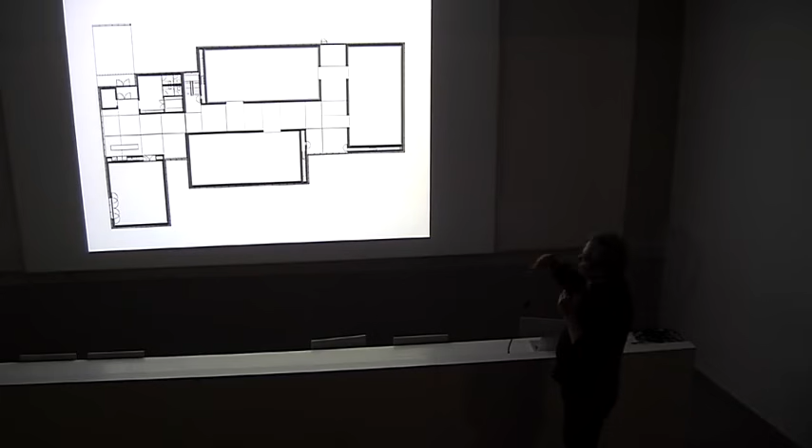He spent time there painting. So what can you do? We were quite young, not yet 30 years old. What can you do as a kind of contribution for a small museum? This was in the 90s. In the 80s there were big museums built, icons of postmodernism. There was a group of American but also Middle European artists who claimed they needed more valuable space for presenting their work, not only contemporary work but also old, traditional work. So what we did is decide to do 4 single set spaces.

In a dimension of 90 to 160 square meters. And in between there is a very distinguished, very informal space, the hallway which links these 4 spaces. You see it there in between. Sometimes it's very narrow, sometimes quite wide. It's lower, of course, than the art spaces.

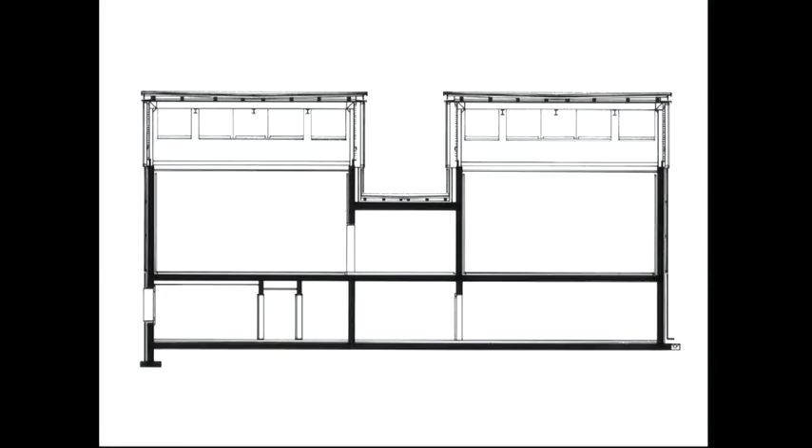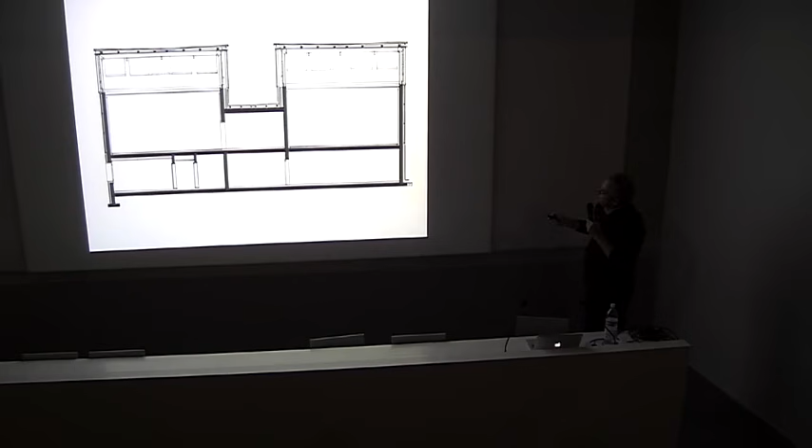The art spaces are very refined. They get light from another space, a light space from above, where light comes in from vertical windows going all along. It's about 3 meters high, with a width of about 7-8 meters. It's quite important to have this relationship of a height of 5 meters, 9 meters in width, and this kind of light space up there.

So there is already now, let's say, about 1 meter 80 centimeters of layered snow, creating these kinds of spaces. White walls, wooden floors, changing exhibitions from the collection they have of Kirchner himself, but also of colleague artists of the same time, combined with contemporary artists, and as a contrast, the space in between.

Really realized in pure concrete, three-dimensional, and lit by the doors of the exhibition spaces, but also by the windows. What is interesting is that if you change from one space to another, you always go through this kind of intermediate space, this hallway. You have this kind of zoning, foreground, middle ground, background, light spaces, darker spaces, individually enlightened spaces.

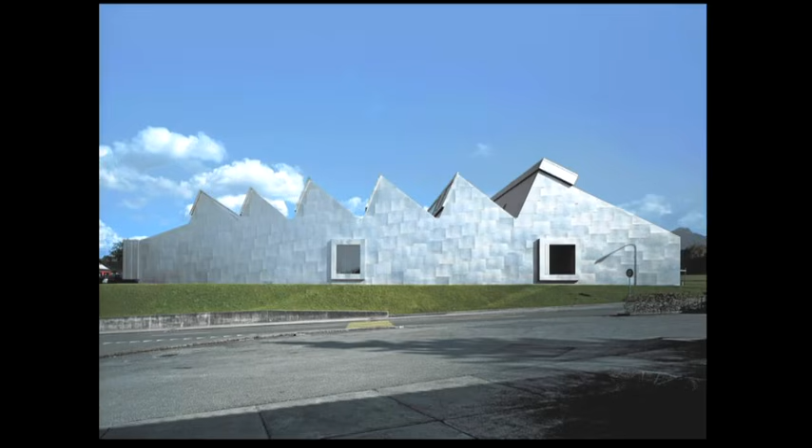It has a kind of envelope of stainless steel panels, shingles, which are in a way matte, but also quite interesting in how they take the light. And you see the differences now, which we recognize because it's also for a father and son artist duo, more local artists, with a changing exhibition program of local contemporary artists. But it was clear they couldn't have the power of what they did in sculpture, graphic, and painting works in big rooms of 150, 200 square meters, but more like cabinet-like rooms.

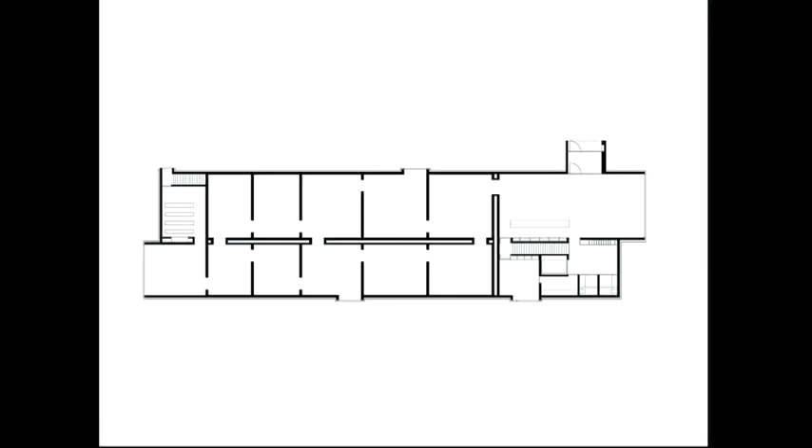So these are 30, 25 up to 55 square meter rooms in a series of 2 rows. You see it with a middle wall which is hollow to hold the technical facilities for the building, with an entry here, a huge window, a southern skylight, and all these spaces are little chapels of light.

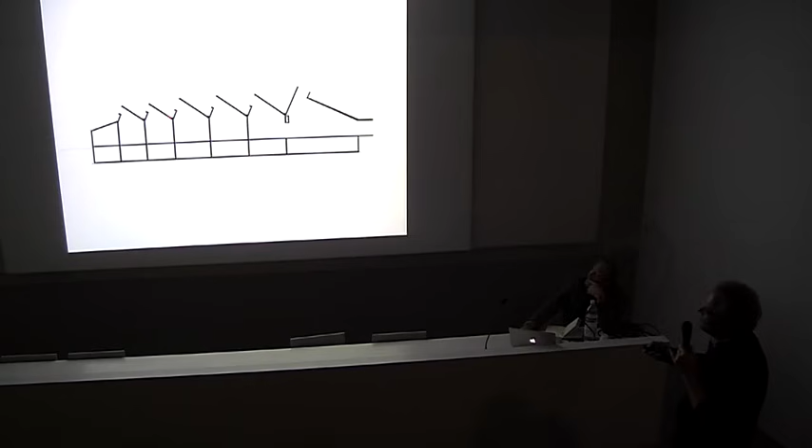You see it in the next slide with the section. So it's an addition of little light chapels, and the smaller the room is, the lower, let's say, the north-orientated shed light. This gives the silhouette you saw before.

The next one, that's the one you mentioned. Next one, Georges. That was again a step for us, because we started with this ideal spaces which became in a way more and more personal the longer we were busy with these small museums.

This is for a collection of really contemporary art, abstract art, but also art of the 60s, 70s and 80s from Middle European artists. It's the collection Albers Honegger. It was given to this place in Mouans-Sartoux in the south of France under the condition that the state France would finance a museum. And we had the opportunity, the luck also, to win this competition for this museum.

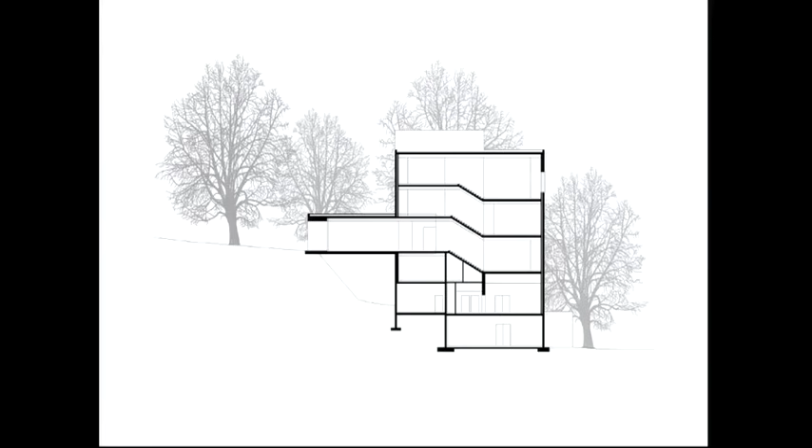It's within a wood with huge Mediterranean needle trees. It's quite dark, and it was in this small community which had a mayor who belonged to the Green Party, who was really interested in sustainability. So he was against every tree being removed. So we had to really make a kind of almost vertical, poured in-situ concrete structure.

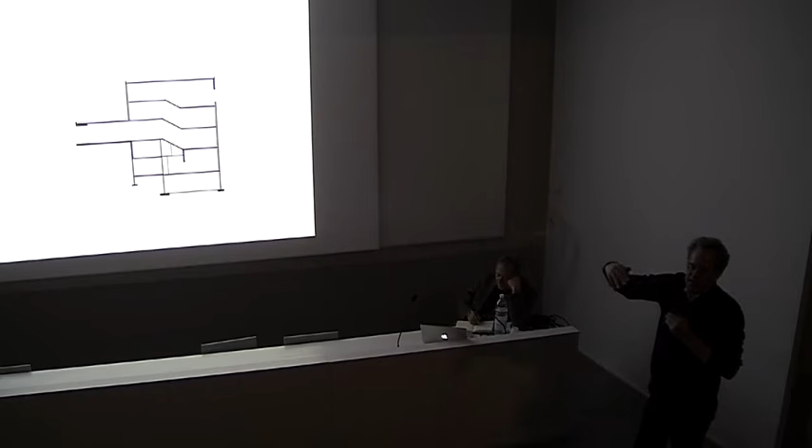A geometrized, abstract vertical object. You see, it's a split level concept. The upper three parts are the museum spaces. The part you see here is a kind of public space, then the library. And it's, maybe you go on, like a kind of spiral. It's like a huge stair, where the landings of the stairs are in different sizes, in different heights, in different widths, the exhibition spaces.

The lighting is not from above, it's from the side. So you turn, you can go on maybe, so you see the ground floor. You turn around a kind of central nucleus with the elevator in the middle, with two doors giving access to the different levels, which changes from floor to floor, with open staircases going around. And here is the entrance.

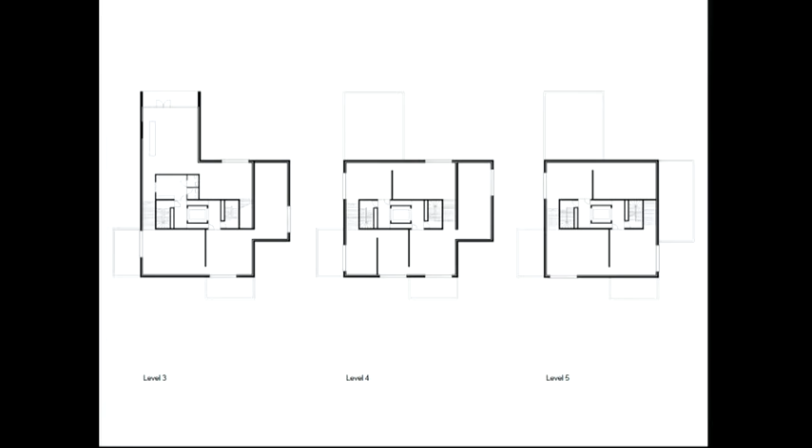It's a kind of bridge-like space, and then you go up like that. You go on like this, up into this space with the height, with the most enlarged height. And sometimes it has an enlargement like here, and on the lower part there, and even another one there, and delivery on the really first floor for the delivery of the art transportations.

So it's not anymore this kind of museum which is monumental, which is not much accepted by common people. It was also the wish of Gottfried Honegger, this quite famous, well-known Swiss artist, that this museum should become more acceptable through its atmosphere of atelier spaces.

So when you get in, or when you get into this bridge space, and then go up, you will have exhibition spaces in different tonality of light. You have the warm southern light, the light from the west part, from the cold, blue-like north light. So I think this is the enrichment of this museum.

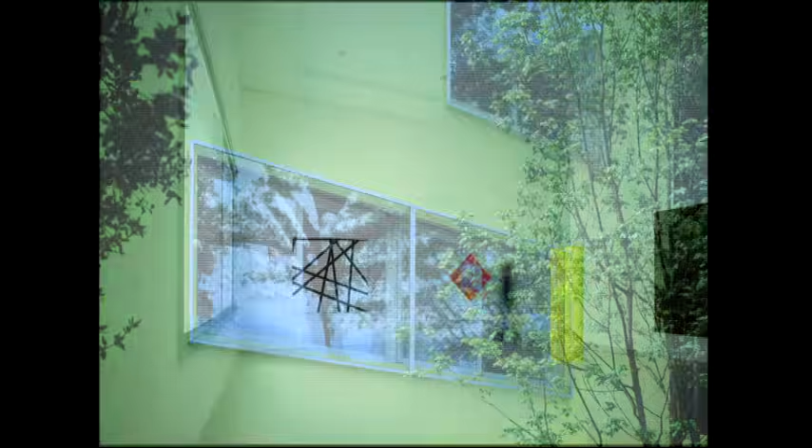It has this strong color outside. It's a visible concrete structure. It's like a light within this dark Mediterranean wood, and it has these large plates of glass in double-pane windows, which reflect the vegetation and give this kind of movement with the shadowing, again with the turning of the sun during the day.

The next one, and then we had the opportunity to go on. That's now a bad, not very visible image, but to work on a museum which is not for art, but for a given theme, like this one, which is a big area of archaeological field.

An archaeological field which signifies an ancient battle where, for the first time, the German tribes were winning over the Romans, the Roman legionnaires under the chief Varus. It's the famous Varus battle, and it's in fact, let's say, the beginning of the German national consciousness of the population.

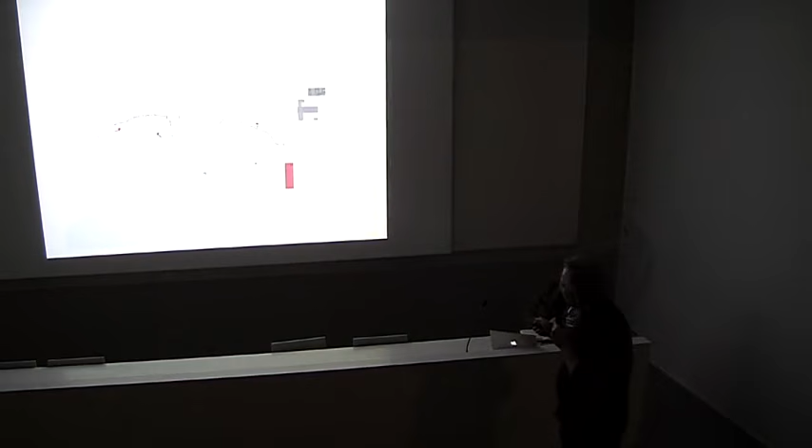The red spot you see here is the museum. You enter there, and half of the task was to remodel the woods, to make openings, to reforest, widen some parts of the woods, so you can see that the German tribes hiding here were really fighting along the whole length of this part, which might even go 10 times longer than this area here, where the first findings were found, the Roman columns coming along here.

It was very rainy, very difficult conditions in the terrain, and in fact the topography goes up like this, so it's a little bit hilly here. In these Roman times, this was really a kind of swampland, quite difficult land.

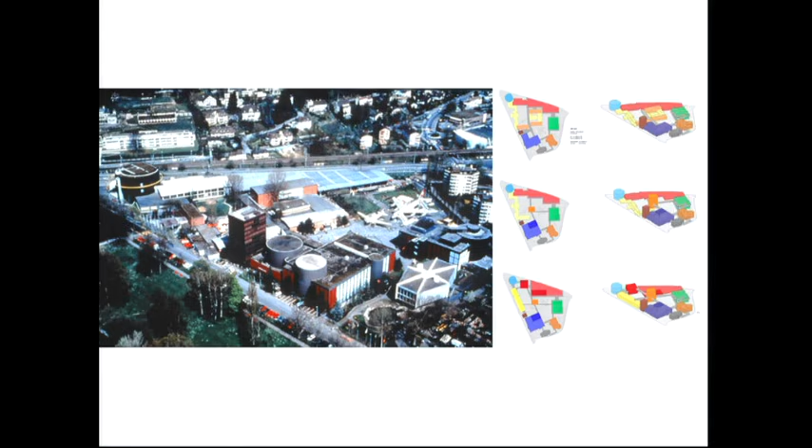It stopped then for a long while. We did some little buildings, some little interventions in the meantime, which again disappeared. There was a kind of balloon installation we did together with the Expo 2002, an installation with a tower with two horizontal arms turning around it.

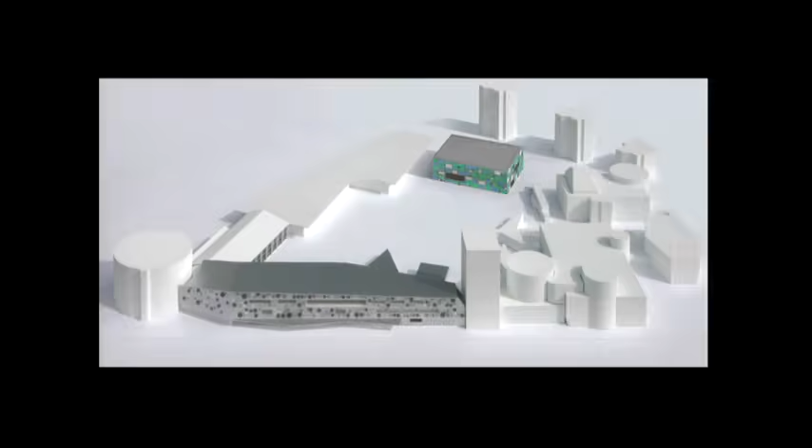But this now was the real commission, where the focus was on three points. The first one, maybe the most important one, is the empty space, the arena in the middle. And then you see this building here, the entrance building, which is a kind of hybrid of different usages, and this hall of the car in the background.

We were looking for, let's say, this is the entrance building. You enter here, you have the restaurant part, you have the shop area. It's also a building which links parts to the left, to the right side, which links parts to the central area, but also to the buildings adjacent to the central area.

Then there is an exhibition on the first floor of digital worlds, of television, of communication systems and so on, in the Congress Center on the top.

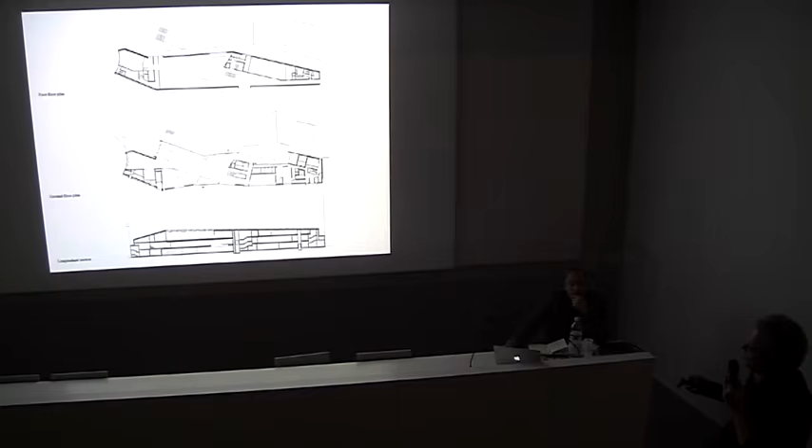We were looking for a language of how we can communicate the content of these buildings to a very large set of people, because they have more than 500,000 visitors a year. So it's the museum which has the most visitors in Switzerland.

And we invented, or we created, this kind of elevation which talks to the visitor looking at it, with all kinds of wheels. It's wheels from cars, from ships, from bicycles, whatever.

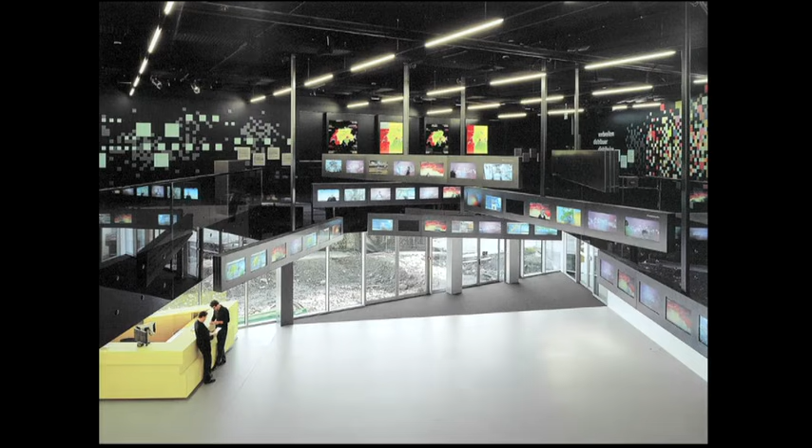And it is part of this kind of strange shape these buildings have, with large openings where you enter, large openings where you have a terrace with windows. And when you enter, you are coming into a space where the exhibition on the first floor is really present as this kind of ongoing, very visually strong presence of the digital world.

And on the other side, as an opposite, there was the question, this demand of a house for the car, for the moving vehicle.

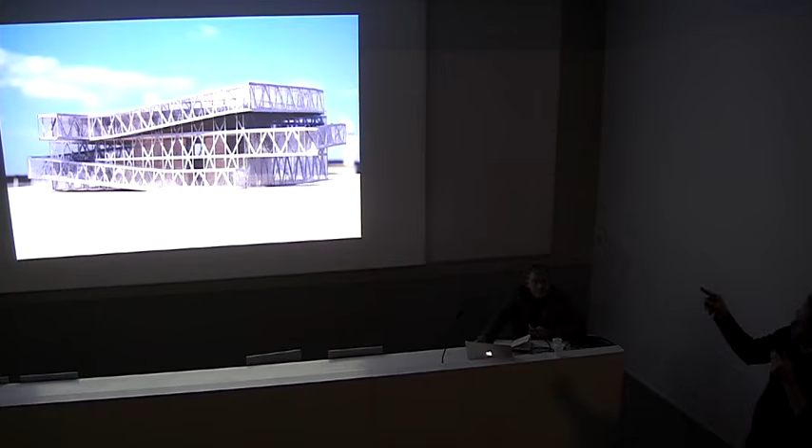The first proposal we made in the 90s, together with the first competition, was this kind of central hallway, structured, very simple structured hallway, which has these ramps encircling, and these ramps reaching the neighboring buildings on different levels, which can give a kind of moving space for people, for visitors, but also for cars, for bicycles.

And then, because the focus was more oriented to the entrance buildings, they just asked for a decorated shed for a car. So what we did, we made a simple hall. We made a kind of mechanical storage space for the cars, for the collection of cars they have, which they could, together with sponsors, have different zones with different themes.

And we tried again with elevation parlante to have an elevation of the kind of compressed cars when they did their work. You know them, this kind of huge junkyards of these stacked, pressed forms of cars. And we wanted to put them as a kind of vertical setting on the facade, as a kind of mirroring of what the beautiful arrangement of the cars in this kind of mechanical archive has in the interior.

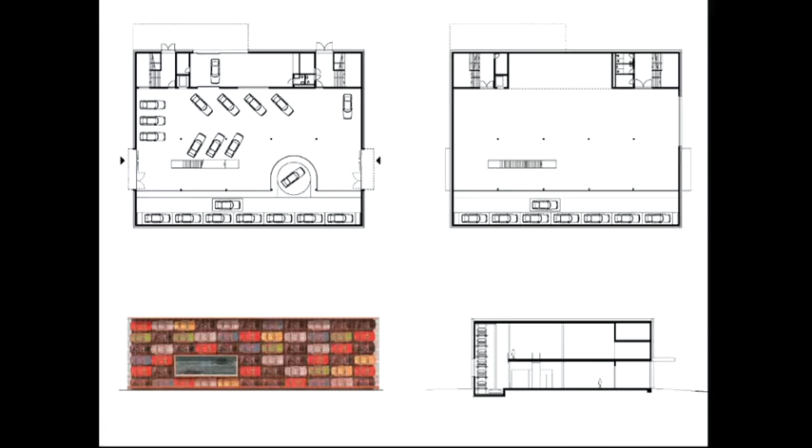But of course, because there were sponsors like Audi, Mercedes, and Renault giving money to the people, they were not willing to go with us in this direction.

So we had to find another way. We were looking for this kind of world you know also very well from the street, from the Grand Route. It gave a kind of really nice result, the children love it, a kind of decorated shed where parts sometimes try to fly away, to vanish away from the kind of a little bit dull box.

They also created a didactic program, a kind of play to find panels which might not be correct, because the reasoning written there is somehow not right. So that's how we started with art museums and ended with this theme museum. There was quite a range of different expressions in architecture during those 10 years.

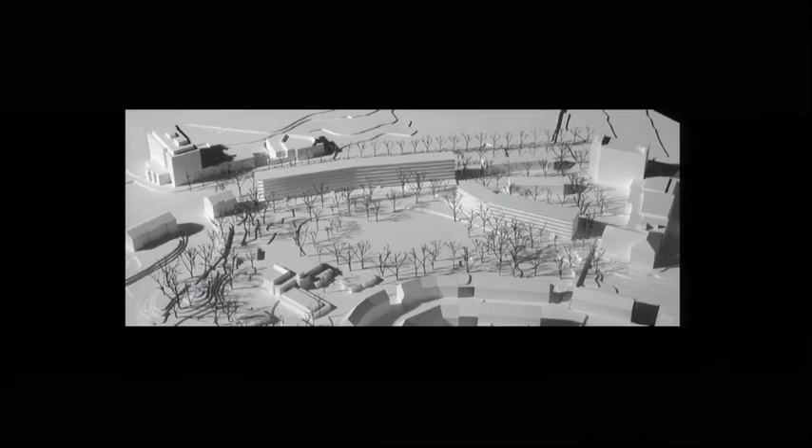Then the next part, which we did in parallel, was really down to earth tasks, living in different standards. This was a competition we won for a community for families with at least 4 children. It's a kind of subsidized community by the city of Zurich, founded after the Second World War for families with many children who had problems finding cheap homes.

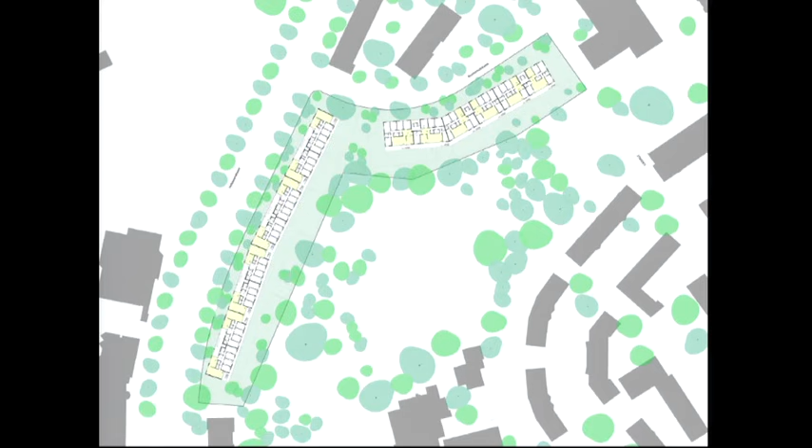And the next one, it is a beautiful site. It is a protected park. It allowed us to put a narrow building along this very noisy street, with north on top, and another one here. The position of these two buildings in relation to the park, but also to the street and the neighborhood, gave the typology of the apartments.

You see now this typology of apartment, which has the noisy street here and the park on this end, with all the sleeping rooms and a kind of circuit around a central element with all the bathrooms, and an ongoing balcony with different depths oriented to the park. That gives this kind of interior space, this enlargement of spacious luxury in terms of having this circuit together with the outside balcony.

And the other building typology is deeper, 15 meters in depth, with a balcony 2 meters wide, which is almost an enlargement of the outside space. Kitchens are sometimes here, sometimes there, also with a kind of circuit around the central part, but with an orientation that is more vital to both sides.

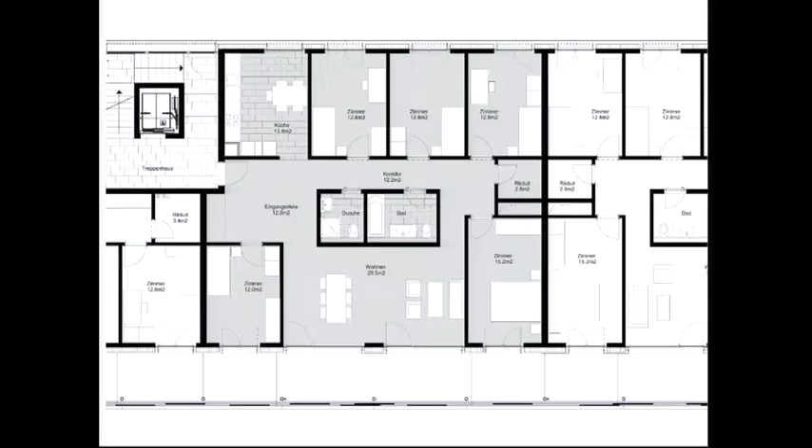These are subsidized apartments, so the budget is quite low. You have to fulfill standards, also in terms of cost, to get the subventions. What we added as the most valuable part is a very colorful facade we did together with an artist.

We noticed at this time, around 2001-2002, that glass was quite cheap for some reasons, in Middle Europe, about the same price as another paneling material. So we could get these panels of glass and tried to use it as a material on the elevation, but also as a kind of sliding element in the zone of the balconies. Some parts are transparent, some parts are opaque.

With these different levels, because the people themselves move these panels, an apartment goes from here to there. It's quite long, and of course they completely fill it with green carpets, satellites, flags from where half of the people are foreigners, so families with migrant backgrounds. It's a kind of beautiful, very livable world.

That's this one in Geneva. It is also an interesting constellation in that Geneva, like Zurich, is really seeking concepts to intensify the possibilities in the inner cities. For some reasons, this part here stayed in the zone of 3-story high villas, while these other parts could be intensified, under conditions that it has to be regulated in terms of how high the rent will be, or how high the price will be when you buy an apartment.

It was the task to find an architectural language to combine all these different standards of high price apartments in the free market, like these ones, which are really a park with a beautiful group of oak trees. It's quite near the center of Geneva, and it was the aim of the two clients.

They were private persons developing this whole area to not have a presence of streets, so there is a very intelligent, solved circulation system that takes the cars quite quickly away underground to the different buildings, and the buildings are more or less still within the green, and you walk through these kinds of spaces. Maybe you see it in the next one.

This is the interior, together with the balcony and the loggia. It has this kind of tradition of luxurious atmosphere, also for less expensive apartments, of how you live in Geneva. And you have this contrast of the 3-story buildings to the 8 until 12-story high buildings.

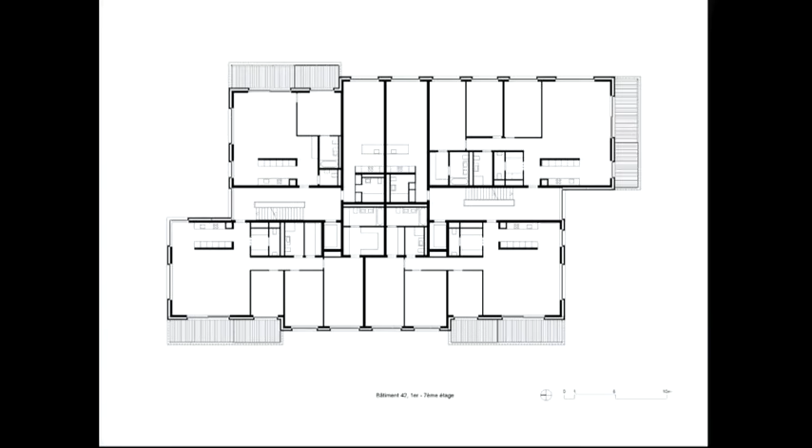The buildings are really fat buildings. You see there are 1, 2, 3, 4, 5, 6, 7 apartments, sometimes even 10 apartments per floor, to get to this density, which the society, the city, wanted. You see it in section.

Again, the quality of the outdoor space was kept through all the different standards of living units. The last of the living projects, residential projects I will show you is this one, which is near Zurich.

This project is also interesting because it was an old industrial area with ponds of water, and the owners gave the park and the ponds as a present to the population, to the city, under the condition that they could, on certain parts, implement some residential projects. We did one, Herzog & de Meuron did just one adjacent to us, and 3 or 4 other teams of architects are now doing the next ones.

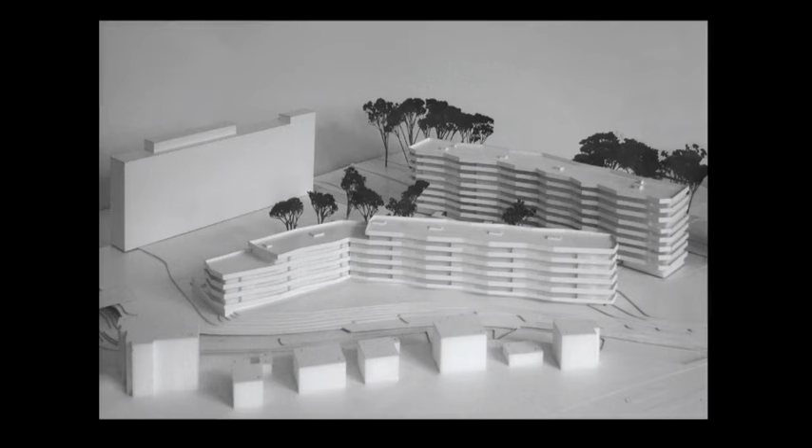You see 2 buildings, quite big ones - the height of the building here is 28 meters. It is really layered, clearly layered in the horizontal parts, between perforated whitish concrete bands and wood-cladded elevations in the back.

It has a quite interesting closeness between this row of beautiful trees, almost 35 meters high, and the building itself. It moves a little bit, slowly, lightly, and is reinforced in the movement to the south. You see it in the next picture.

Together, sometimes with living on the ground floor, but also having a lot of public usages like kindergartens, a little coffee space, a common community space, and above, the different sized apartment units. You see the position of the 2 buildings, and the typology.

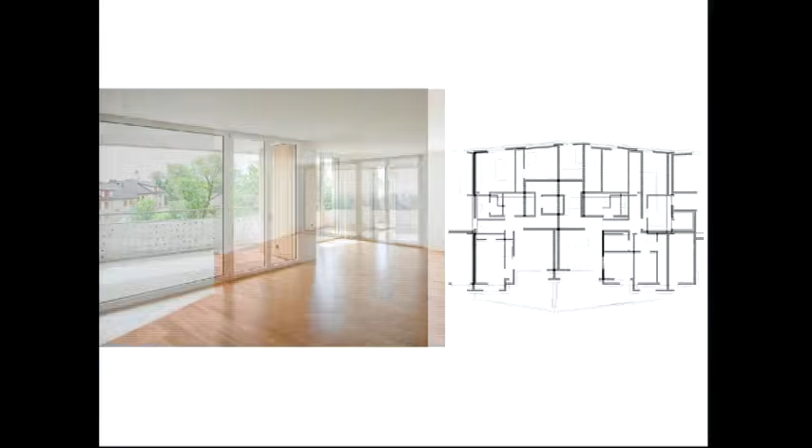It was important that you have an orientation to both sides - to the pond, to the row of trees, to the south. You have these zigzag-shaped balconies with different depths, and the lower parts, which are very close to a beautiful river, accompanied by a kind of lower vegetation of river-near trees.

That's the lower building. A courtyard in between, with low buildings for bicycles and entrances, which gives a kind of nice zoning of public space, semi-public space, and then coming to the private spaces of the living units.

And then the next decade, the one we are working in now, is when we finally arrived in Zurich with the big projects. In the 2000s, from 2000 to 2011, 2012, Zurich had really a booming time. We did this building here, the Prime Tower - for a long time the highest building in Switzerland - and we did another building here.

I would like now to show you these 2 buildings - the Prime Tower. You have to see that Zurich is quite a Calvinistic town. It has 500,000 inhabitants.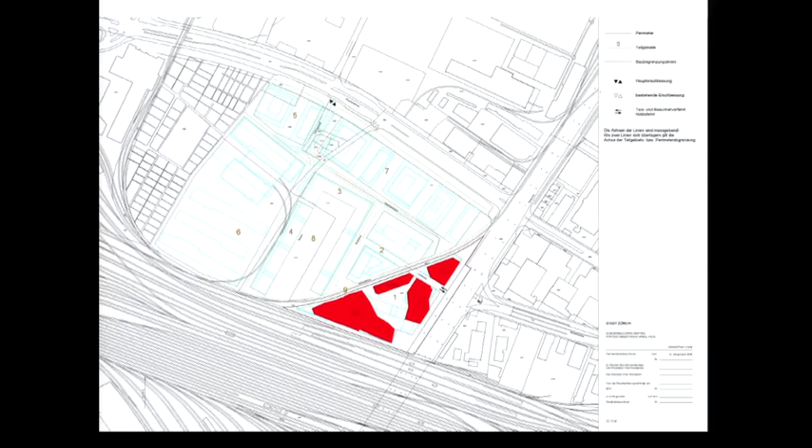Here you see the development in the competition. It had this kind of dull form which gave the program, mainly offices with public programs on the ground floor and top floor. They had very intelligent demands in terms of office spaces not being deeper than 9-10 meters, so circular or square buildings didn't have enough surface to light the building in the depth. We had to look for forms where there is an enlargement of the elevation surface, and it ended up in this free-angled form which, in the sections, gets bigger, with projections that enlarge the surface with the height.

And you see this here, it's clad with a mirroring greenish elevation, which is quite nice because depending on where you look at the building, it gives the building all the time another presence in the city. This tower is on the deepest point of a valley, and sometimes you see it from the hills, and the building appears like a dark building, and sometimes it reflects, if you are close to the building, it reflects the ceiling.

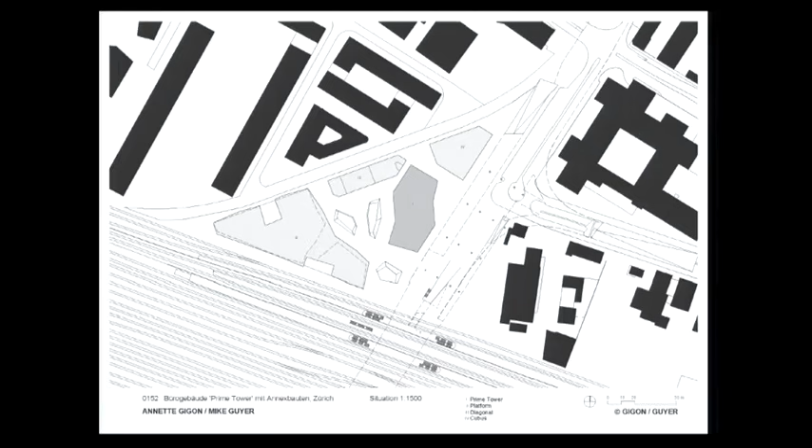The projects are not only present in the tower but also on this other horizontal building. It has this kind of glass facade on the new buildings, and this mineral materiality in the old building, and also in this other building you will see afterwards, with the white concrete, that's the inner courtyard space.

It has an interesting presence day and night. In the day, it has this kind of shimmering, reflecting presence, responding to the lighting atmosphere, to the neighborhood, to the sky. And in the night, it turns, because it gives the inner structure of the building, which makes the visual presence of the building itself.

So this is now in between, that's the main entrance. The next one, that's the hallway, the entrance lobby, 12 meters high.

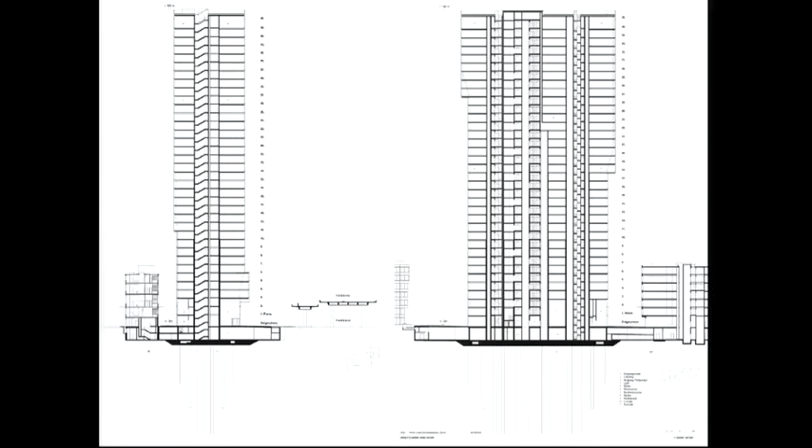Then you see it has a section which is quite narrow, and it has this other section where it appears almost like a slab. And the next one, you see it's this kind of octagon shape, which has this presence you saw before in the images, all the time changing from the different viewpoints you look at the building. If you are far away or close to the building, it has a big richness in how it stands there in its presence.

And of course it's an investment project, only offices. There are a lot of firms, about 25 firms of different sizes, renting these spaces as you see them now here.

Because it's open from the ground to the ceiling, it has this presence, viewing to the lake, but also, for the next space, you can almost see through the elevation to the next space. It has this kind of fore, middle and background through this reshaping of the floors. The next one, it has of course this entrance hall for big clients, lawyer associations.

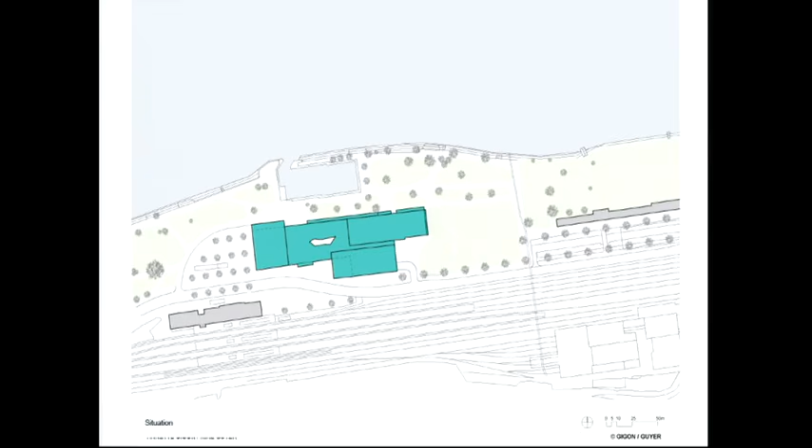It is really on the lake of Bodensee, on the north border of Switzerland and Germany. It's really beautiful, directly on the water with a little harbor. It is very horizontal - you see it has mainly 3 stories, and on some parts it goes up to 5-6 stories.

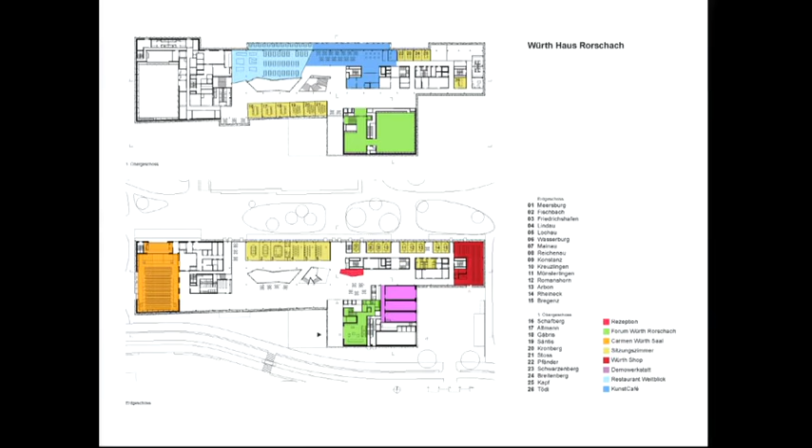It is a multi-use building with a big conference room, restaurants, and a small museum - that's the green one. With a headquarter, that's all the blue spaces, a headquarter part, conference part, and a kind of laboratory part for the education of the people. It was the main building for Middle Europe - mainly Switzerland, Austria, France - of the company Würth.

The patron, still living, Mr. Würth, has a big affinity for art. So every building he's doing - and he really has created beautiful other buildings by other architects in Germany, but also in Belgium and in other towns of Switzerland - is always in connection with art, and these art spaces are open and accessible to the public, also on weekends.

This one we are still a little bit busy with - it's been going on for more than 11, 12 years. It's in the middle of Zurich, in a completely built-up part. It's an industrial part, quite interesting because it's the last industrial area in Zurich. The other half is still going on, and they just built a new silo tower, 120 meters high.

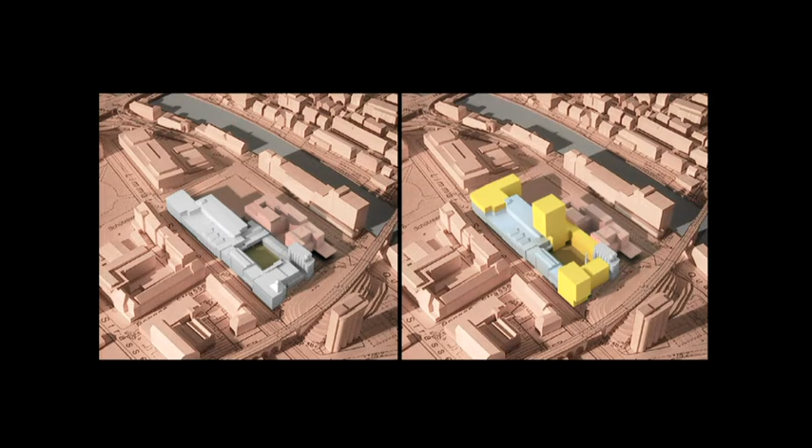What we did - you see here, that was the existing buildings. We kept as much as possible of the existing buildings, which are quite nice. It's an old beer brewery, and we added 3 new parts, the yellow parts, really intersecting and going together with the old buildings.

You see it here - the white part belongs to the art center, because the art museum, the Kunsthalle for contemporary art, the experimental art museum, was already there in the 90s, and the city was really interested to keep it, along with the galleries and informal bar spaces. The tower in the back is a residential tower, and the red building is an office building.

It's the architecture of Löwenbräu, the company which produced beer in the 19th and 20th century, built and cladded with this kind of clinker, in reddish and yellow color. We reinterpreted it again with ceramic tiles on the new residential and office towers. This is white concrete, which is a kind of huge contemporary art space put on top.

The next one, extended in the back with a kind of outdoor exhibition space, which also serves as a big party space in the summer, with terraces here and on top here.

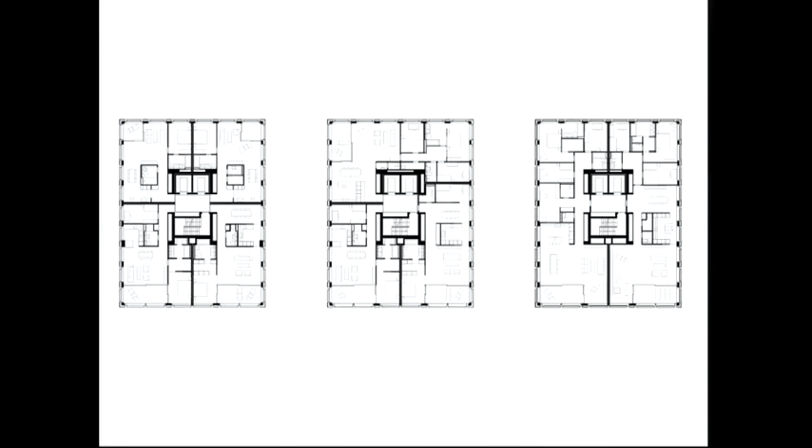Because the surface is so restricted, it's not more than 600 square meters. There are 4, 3, 2 apartments. Sometimes on top there are maisonette apartments that don't have balconies. We sometimes have loggias, but most owners who bought the apartments really used every square meter of the space they could.

And the next one, so we developed a window which is about 2 by 3 meters, which really moves on the ceiling as a whole part, and replaces the function of a balcony. So it really opens in the summer.

You can open these 2 parts. All the others have a kind of little openings on the vertical profiles of the windows. But this replaces, let's say, the lack of the balcony.

Then the third building, the office building, which is cladded with these reddish ceramic tiles, has quite an interesting glossiness and structure, and richness together with the windows, but also together with the matte surfaces of the existing buildings.

And it's very close to industrial, still existing, now renovated pieces like the silo building or like the chimney here.

Now I think it's interesting for you to know what we started to teach in 2012. I just spent half an hour in the atelier of Georges, and I would like to show you what we do, in case you might be interested to come for a semester or so as an exchange student to the ETH. We try to focus every semester, Annette and I, changing semester by semester, on one theme. Here it's structure and space.

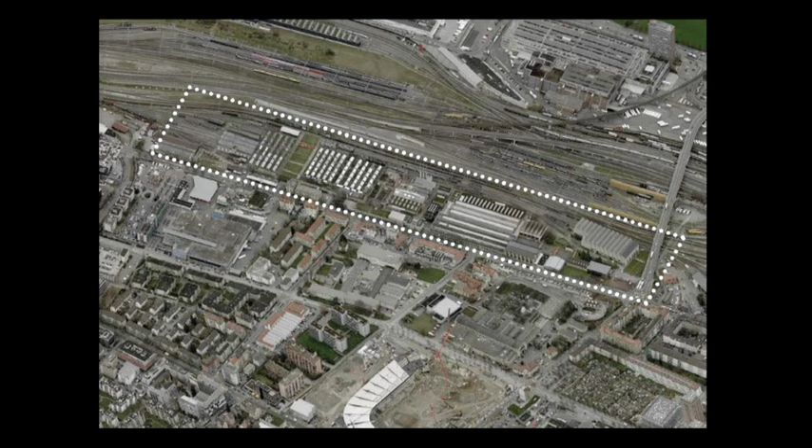So what we tried, we picked this kind of part of an industrial area. Then we made a kind of plan with different parts on existing buildings, aside existing buildings, and new plots. And we gave the students, we have about 55 students per semester, these kinds of buildings.

We think they're really influenced by a really important structure, the structure giving, let's say, the atmosphere of the space, to build big models. And you see, you just go on, George, the next one.

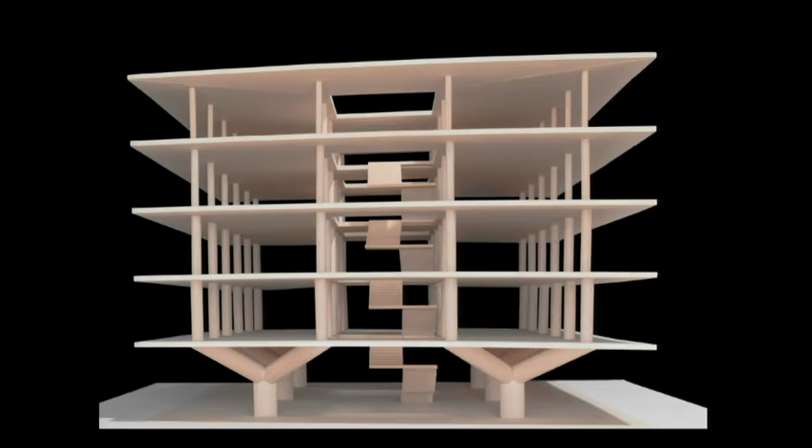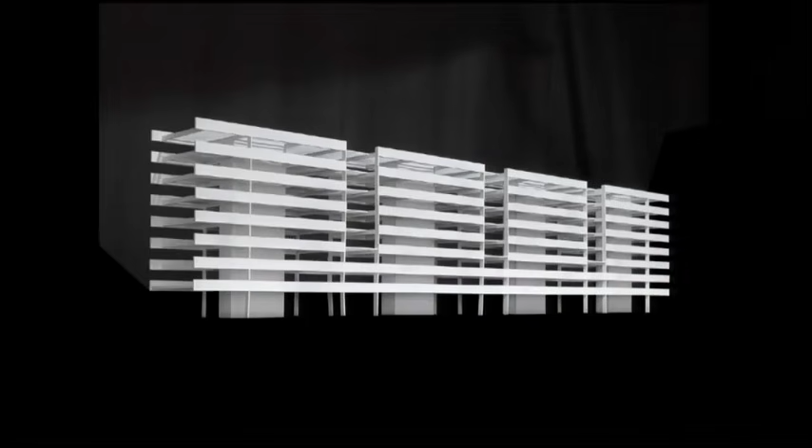You see these spaces of a building in Brazil by Mendes da Rocha. You see a building in Italy by Libera and Musmeci. You see a building by OMA in Rotterdam. And you see the project of the students, a student project, which quite refers to these references they studied in a week or two, but still in their own way, with this kind of interior spaces.

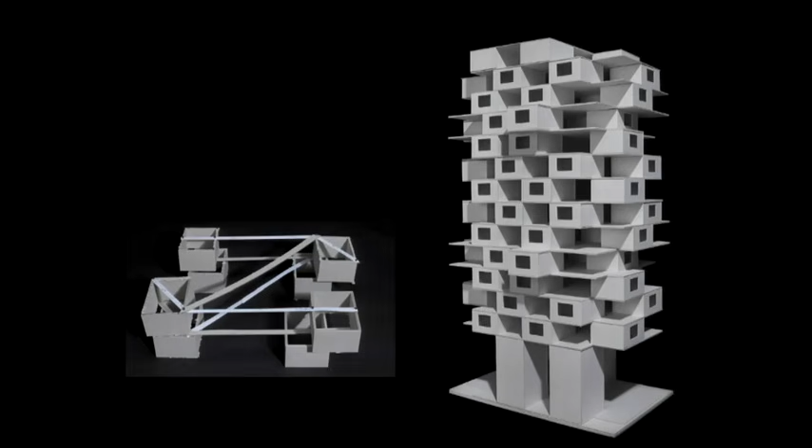The second project of a student, a tower, a living tower with these boxes, which are really in this system he shows on the left side. This gives a kind of static balance, which makes this kind of arrangement, which you see here in the model, possible.

The next one, a kind of reference to the Stadskantoor in Rotterdam by a female student, which is, I think, interesting in the section. You see, and in the floors, quite interesting.

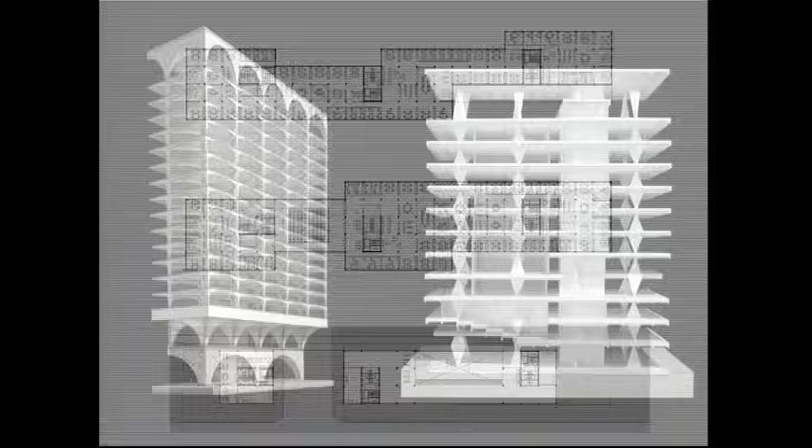And then these models, we work a lot with models. These models are about 1.50 meters high. We work a lot with them because for the students it's quite important that they really see how these spaces are functioning with the structural idea.

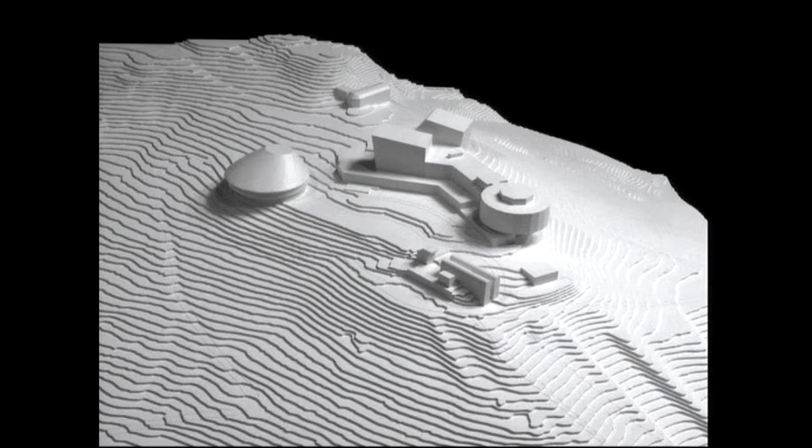And you see, the theme changes every time. So now I'm again in a semester, and we have, as a theme, not structure and space, but elevation and space. And again, we go back into history of architecture. They do models or plans or research, and try to link somehow in a creative way to their own designs. That's a diploma work. We do also master works.

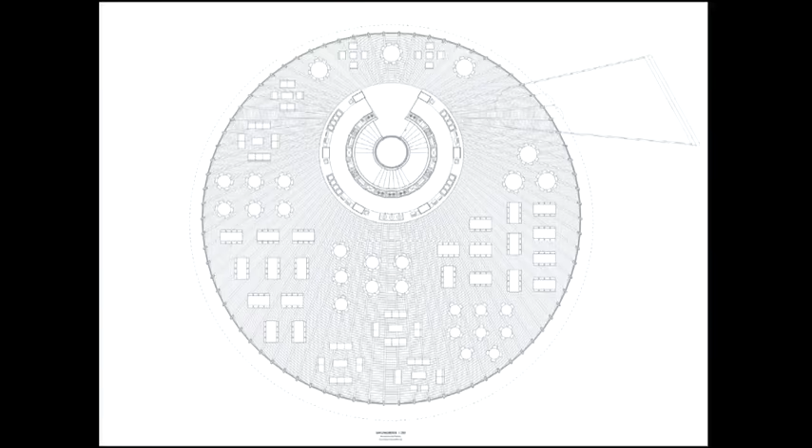You just go on. That's a restaurant in the mountains, the next one. Then we do seminar weeks, Tokyo, Kyoto, once or twice a year, the next one.

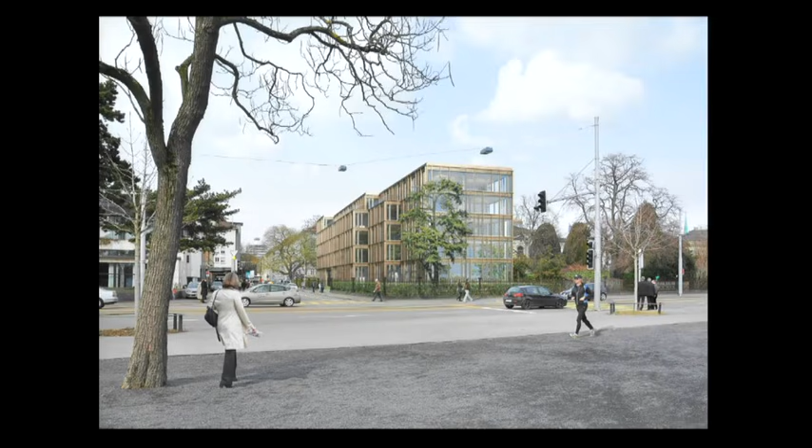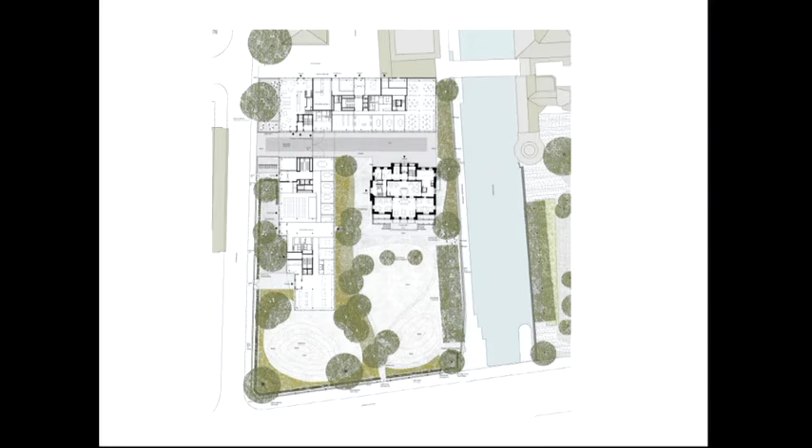Here, this one, together with the villa. It's not a big building, but it's quite nice because it's in a double park. It has the most important hotel just adjacent as a neighbor. And it's, you see, it's this one here. It's completely thought of as an envelope, in German it's called Messing, brass in English, or in French laiton. It's a very valuable metal which, like bronze, becoming older gets more and more beautiful.

So it's an office building which is quite regulated by the zoning laws. It is together with the villa. The villa is a gentleman's club, the next one. You see it here, it's a beautiful building. And we do the interior in a very English-like, 19th century style. Distinguished gentleman's club, unfortunately without permission for women.

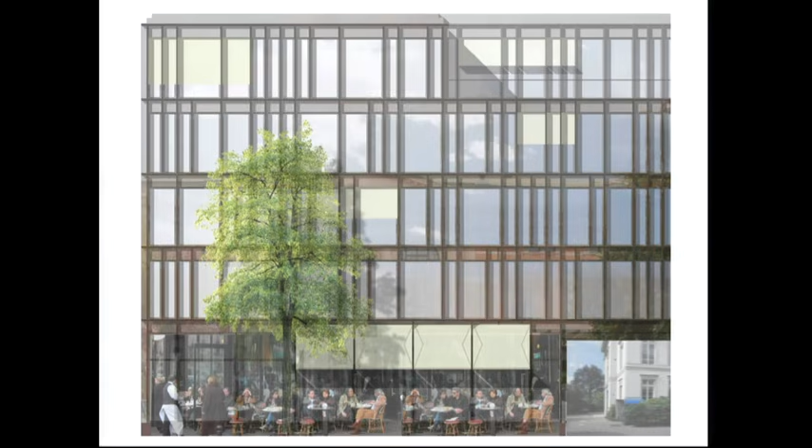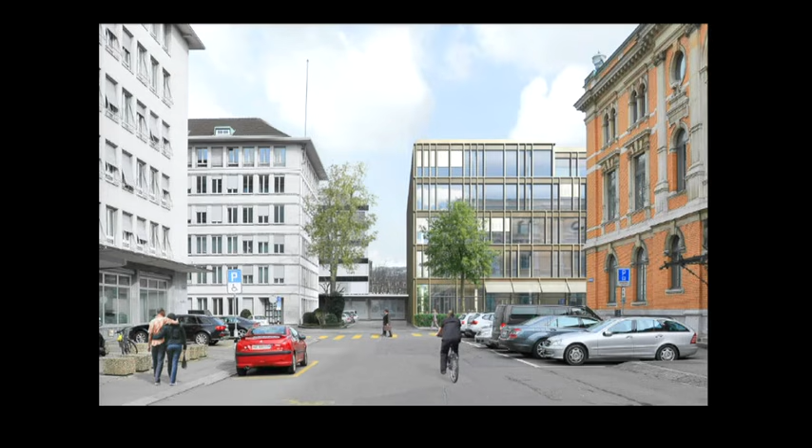The next one, you see it here in section. It's linked underground, the next one. And here you see the first ideas of the elevations. It is quite profiled, it has a tectonic depth of about 30 centimeters but is very thinly constructed, with this kind of irregular grid where the narrow parts are open and the others are fixed, with public usage on the ground floor and a kind of public entry to the villa. We will start building it in a month.

The next one is this one, why I was coming from Paris today. It's the École Centrale Supélec in Paris. It's this building here. It was quite an intense experience because it was the first time we did a competition in a public-private partnership constellation. I think that's for you, if you are finished as an architect—it's the reality, for sure in France.

That means you have to work very closely with a developer to develop a building, not only in architecture, but also in price and in usage, and in a concept for how this building will get old, what kind of flexibility it has.

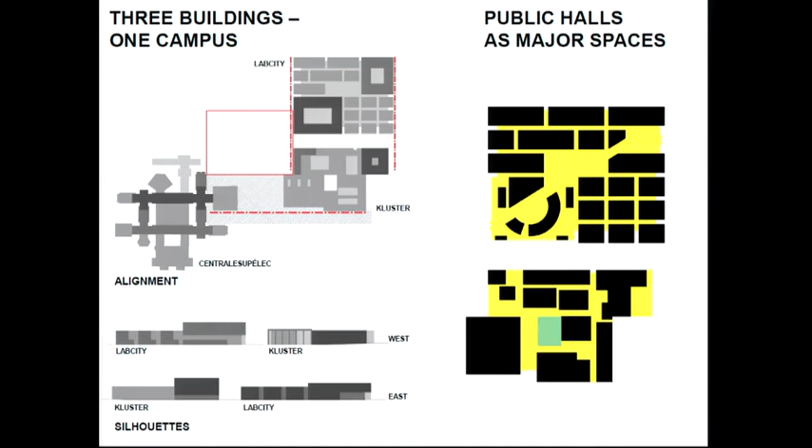It is a plan, an urbanistic plan of OMA. They are building this one now, the next one. And the two buildings are quite closely linked. You see them here—this is the old building of Supélec. It's a fusion of École Centrale et Supélec. And this fusion with a new vision made it possible for them to get the subventions to build this new campus. It has these central halls, as you see them in yellow, and these kind of really segmented parts, like little cities put together, creating interior worlds.

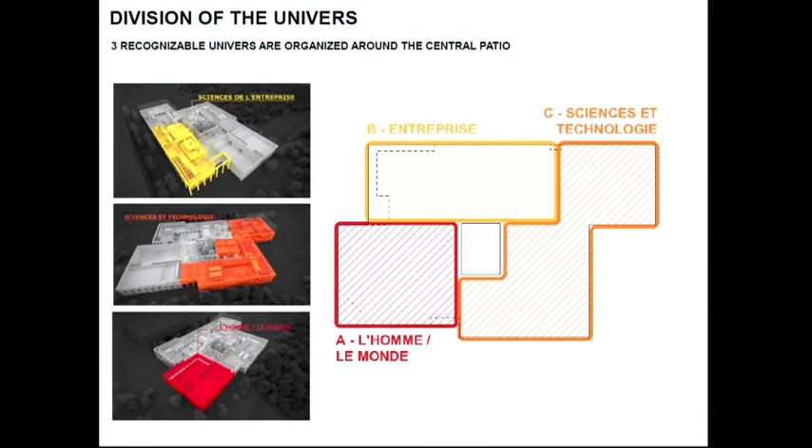You see that the different parts are really mixed. There is no kind of monogamic zoning, but all parts are present in every part. And in this kind of mixture, they try to create a kind of synergy which is very valuable for students, professors, but also researchers.

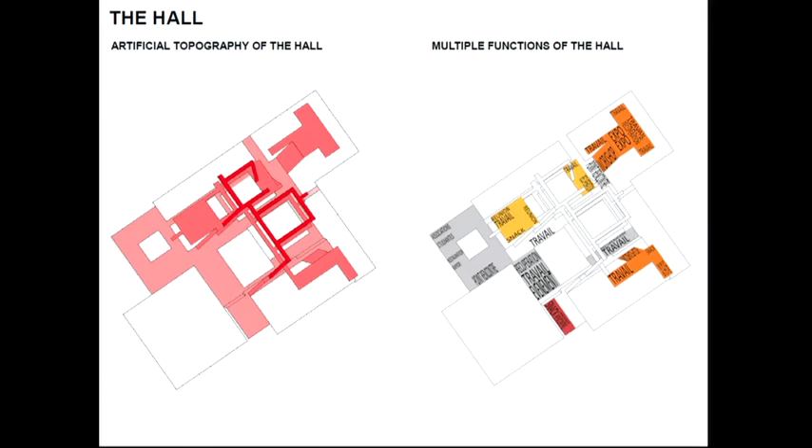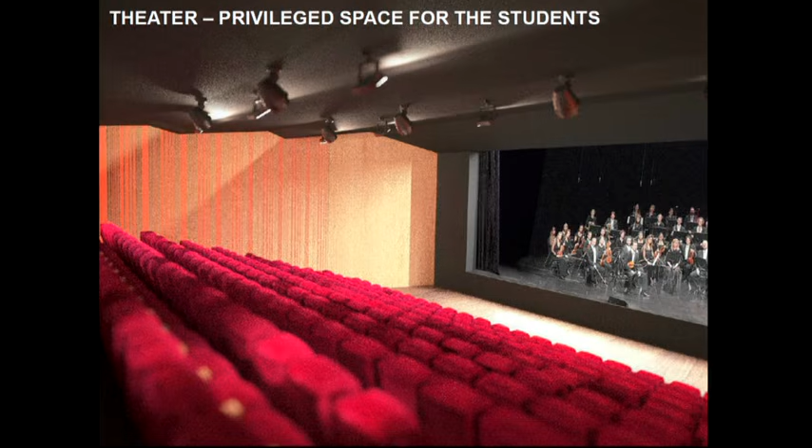That's the interior. It has everything: sport facilities, an auditorium, research platforms, offices, laboratories, salles d'enseignement in different sizes, and student facilities. It's designed for 2,800 students.

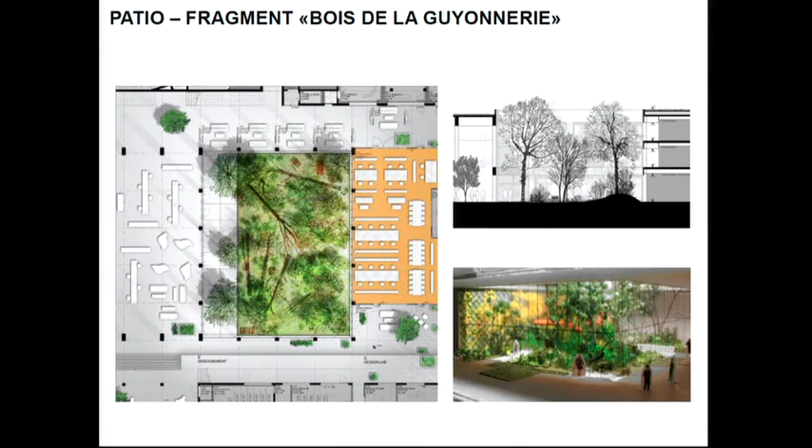It has an interior courtyard as a kind of outside space you can go into, like a part taken from the wood just beside it, reinforced as a kind of wild piece of nature. Some parts of this patio, like trees, are also present in the hallway because there's no underground, so they can really grow in the natural earth.

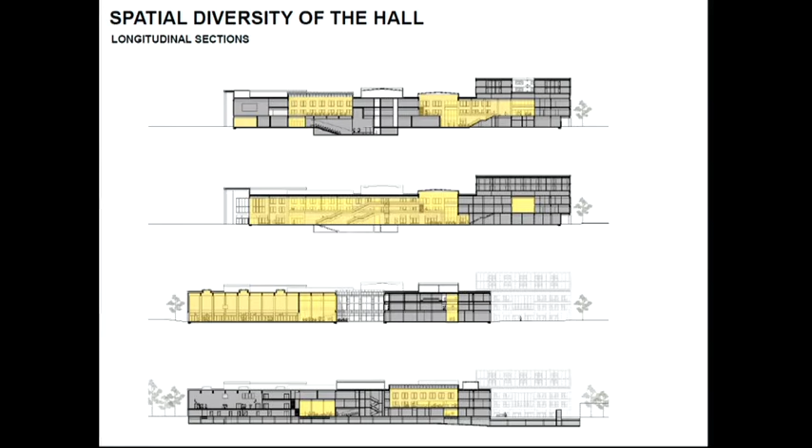You see the section in the longitudinal parts, and in the other parts you see how diverse this hallway develops, sneaking through this horizontal big volume.

Then you have the elevated parts of the platforms, and you see the three levels, with life being most intensive on the rez-de-chaussée, becoming more private and limited at higher levels but still public. Once you enter the interior, you're in an office, a laboratory, or a plateau projet.

That's the elevation, a kind of tectonic research. We're interested in having a depth of about 40 centimeters and interweaving different grids with different colored ceramic tiles together.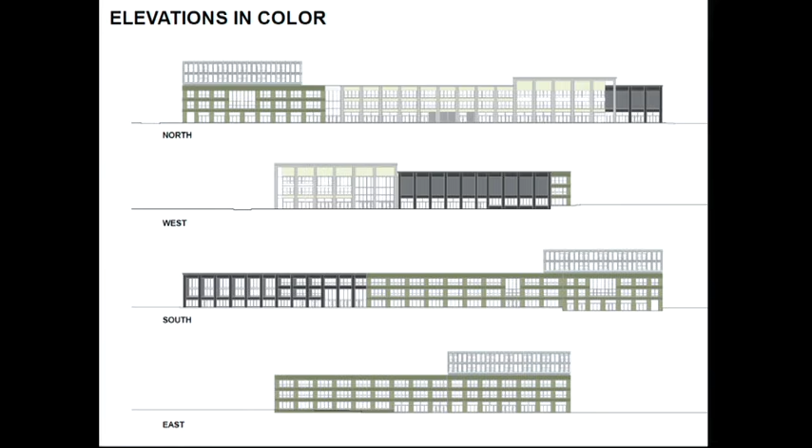Up here is a hotel of 110 rooms, which was part of the concept. We're doing this project with Bouygues, and they proposed it as the link of the school to the outside. Startups coming from the school, Centrale Supélec, can stay here with their people, use all the facilities, make common research programs, have talks and workshops. I think it will be an important part of the whole concept.

You see here the different colors with the different surfaces, forming the surfaces.

That's also a building I want to show you — maybe the most interesting residential building we will do, or are doing now. It's exactly in this will of doubling the intensity of the neighborhood, doubling the grade of usage.

It's an interesting shape, an adding of 2, 4, 6, 8 volumes at different depths and lengths. In the model you can hardly recognize the building itself, because some parts are almost 70 meters high, here 45 to 48 meters high, but here it becomes only 13 meters high.

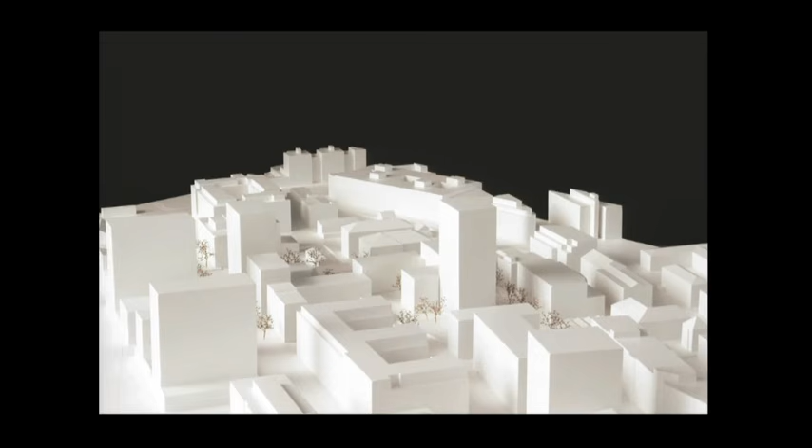What's also important is that the ground floor is completely open, so you can go through it. There are different closed courtyards and half-open courtyards, each with different themes, and the public space is quite generous. This is now the first 5 floors.

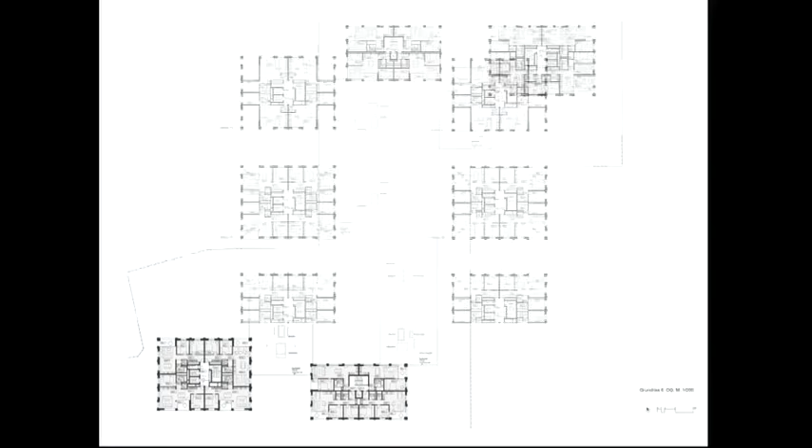Then it slowly becomes less and less, and ends up in the two towers at the end, building 1 and building 8.

In the towers, we succeeded in introducing something new, because this kind of horizontal layering becomes dull over time. If you build a lot of residential units, you search for more richness in the space. These are the apartments we can now build in the towers.

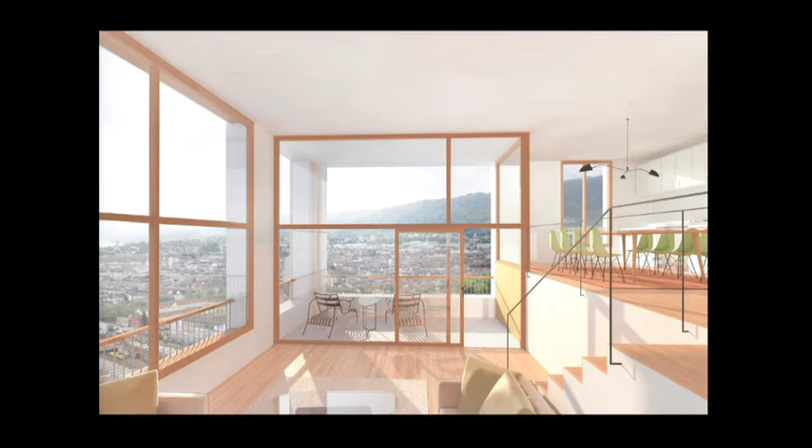It's this kind of three levels, three floors, 1.5 times 1.5 high living floors. I think it's important to have these high spaces in the towers, to give a feeling of being high and looking down, a feeling for the verticality.

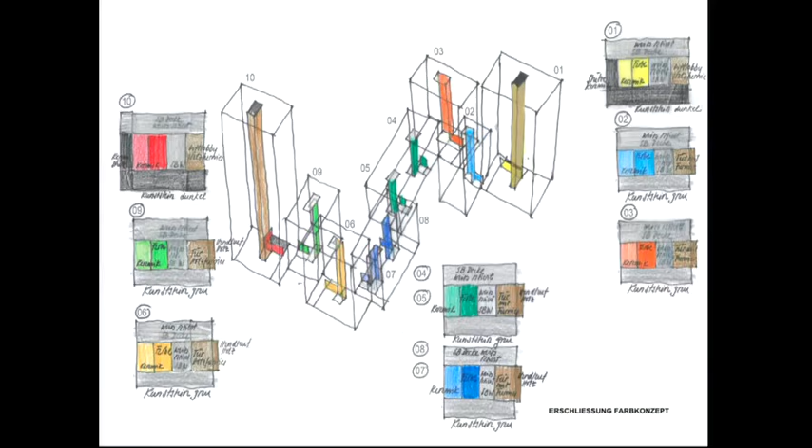That's a sketch for the interior.

Ceramic tiles again for the identification of the different units. The next one. And then the intense working on what are now the elevations. What is now the language of the architecture? How is the building now speaking to us?

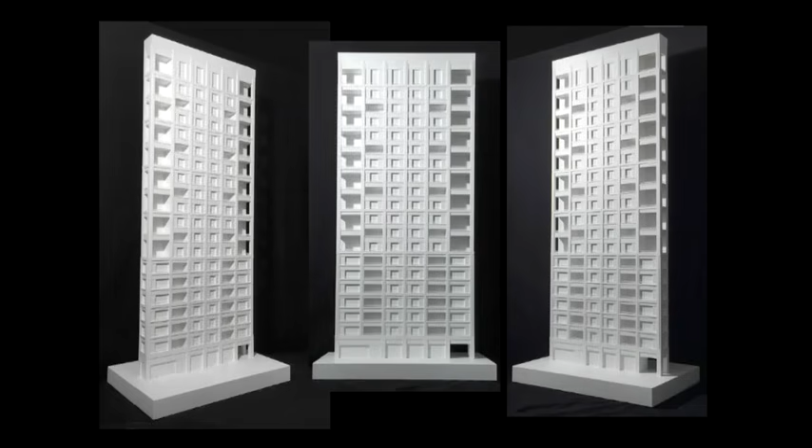8 buildings on a series of 13 until 68 meters high. And we have chosen now a very tectonic treatment of the facade, and you see it here. It has now 60 centimeters of depth where the different layers play. It will be, in a way, maybe the most classic building we will have done until now.

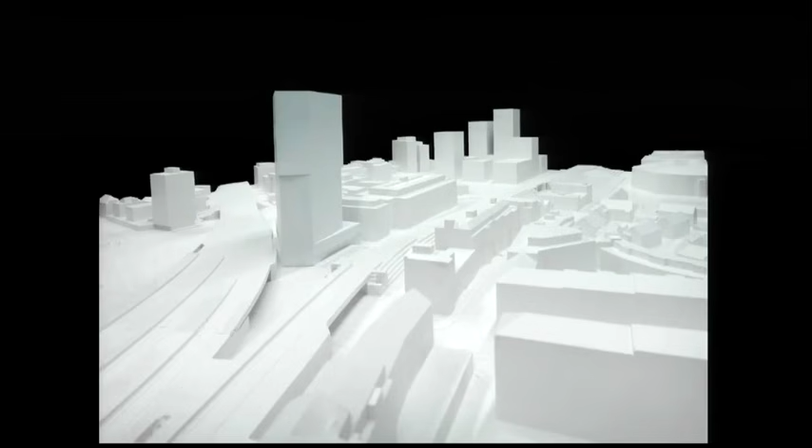Okay, and then now the last one, which is a kind of beautiful sister of the Prime Tower. It's the next one, it's this one. An office tower, 80 meters high.

The next one, you just go on. Again, you see that these are the two railway tracks. This is going to the main airport. Here is the center of Zurich, and here all the trains are going to the northern part of Switzerland, from Zurich to Germany. We tried to get the people from this higher level, which is about 12 meters higher than the ground level here, through different entrances.

You don't, let's go on, you don't see it. You see it here, you know that you can enter here, but also there, and it gives this kind of public usage and public intensity to the Sockel part of the building itself.

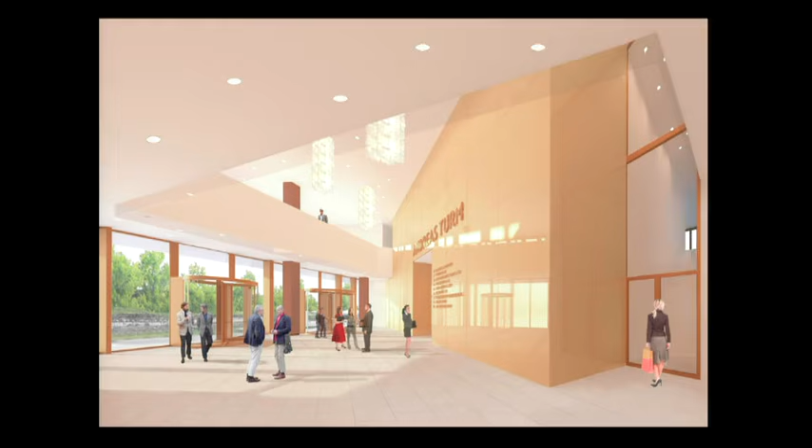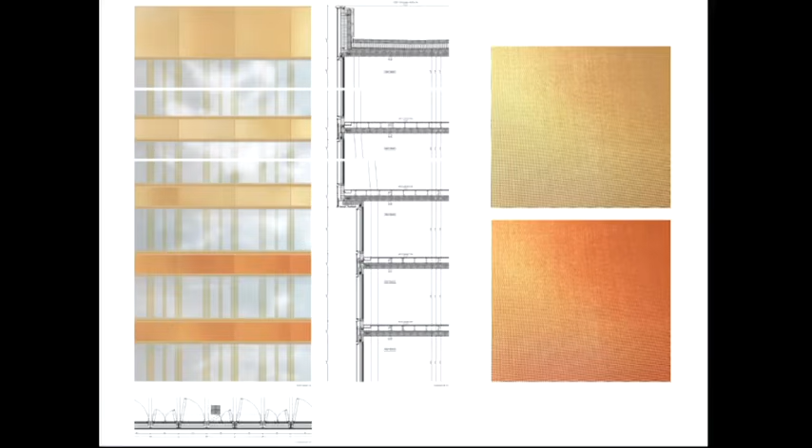And the elevations are done with textile laminated glass. The next one, you see it here. So we have this kind of opaque glass in the thickness of the floor, and they will be covered with textile laminated glass between the panes, in a very light golden tonality, a very bronze tonality, and it will change from side facades to side facades.

And again, it has this shaping, and at night it turns to reveal the structure. You see? It's a little bit the beautiful sister of the Prime Tower. Okay, that's it, thank you.

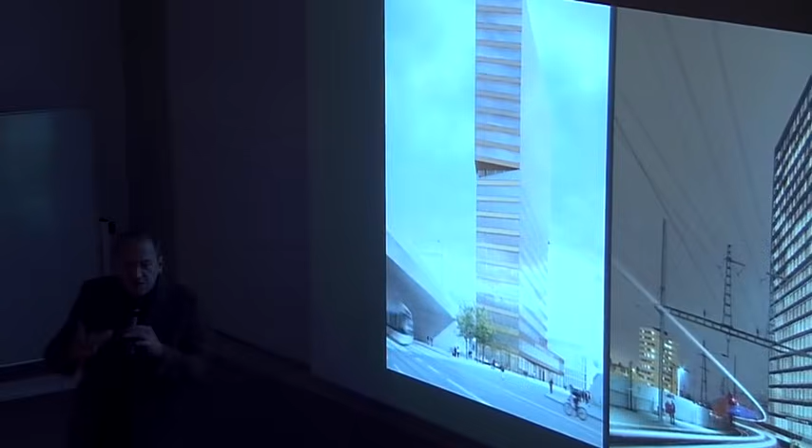Dans le projet précédent aussi, cette richesse de cette porosité des rez-de-chaussée qui viennent un peu comme un snake, dans un système qui semble déjà presque hyper dense, et où finalement vous apportez encore, avec une architectonique extrêmement lisible, simple, évidente, sobre mais pas ennuyeuse, une qualité d'espace et une poésie que je trouve tout à fait remarquable.

Donc je me souviens avec émotion, pendant que tu parlais, du travail laborieux, difficile sur le panopticon, sur lequel tu avais entre autres beaucoup travaillé à Rotterdam, et de pas mal d'aventures partagées, et je trouve que c'est un chemin parcouru qui est absolument magnifique.

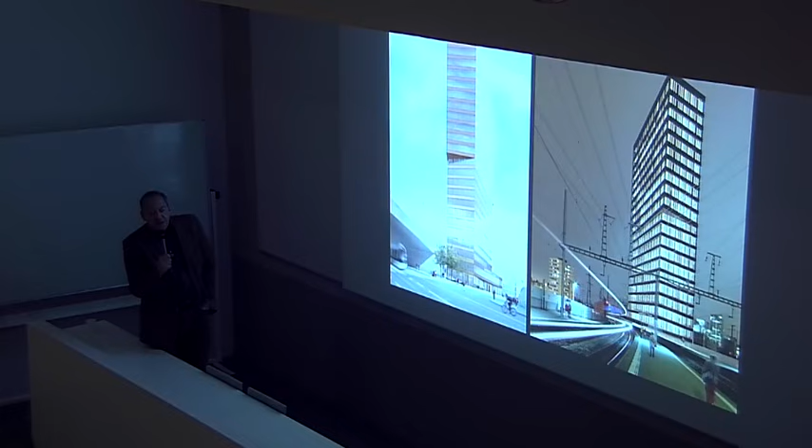Je t'en félicite, je te remercie aussi de cet appel du pied que tu fais à nos étudiants et à des partenariats avec l'ETH de Zurich, puisque nous sommes voisins. Est-ce qu'il y a des questions, à la fois voilà, sur cette aventure, sur...

Thank you very much for your conference. I was interested when you talked about your agency working on its own language. I was wondering, with the use of materials and ornamentation throughout your career, there has been a certain revisiting of themes known in brutalism, such as found objects. Do the ornaments you use, for example in Lucerne, come as elements that you have found, and how are they always reworked, and for what objective? I was also wondering, is it mainly in the project of Lucerne, is there a working around the idea of wit that was developed during the 80s by Robert Venturi? And is there an attempt at redefining wit or humor in certain of your buildings? Thank you.

Okay. You see, Lucerne is in the way, and it's clearly linked to Venturi. It's the kind of building or box-like building which talks to you, not by, let's say, tectonic Middle European referenced architecture, but by a sign or an object.